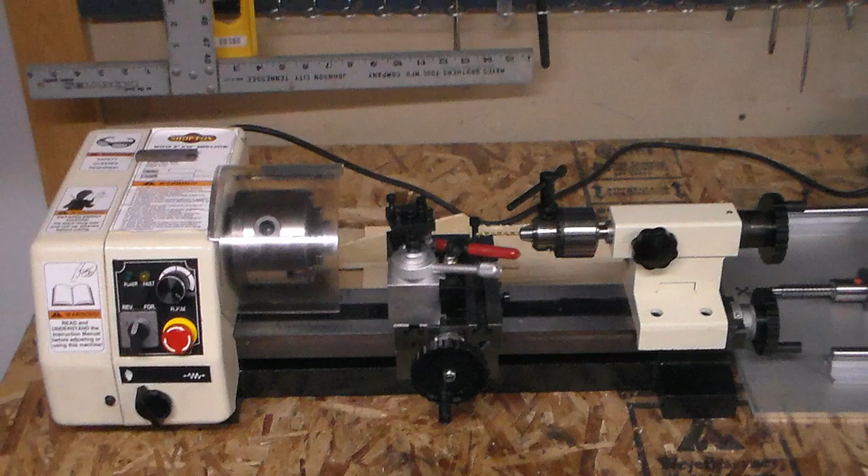I'm going to demonstrate how to take a picture of a house plan and import it into Fusion 360 the easy way. So we're going to go into Google, search for house plans, and go over to images.

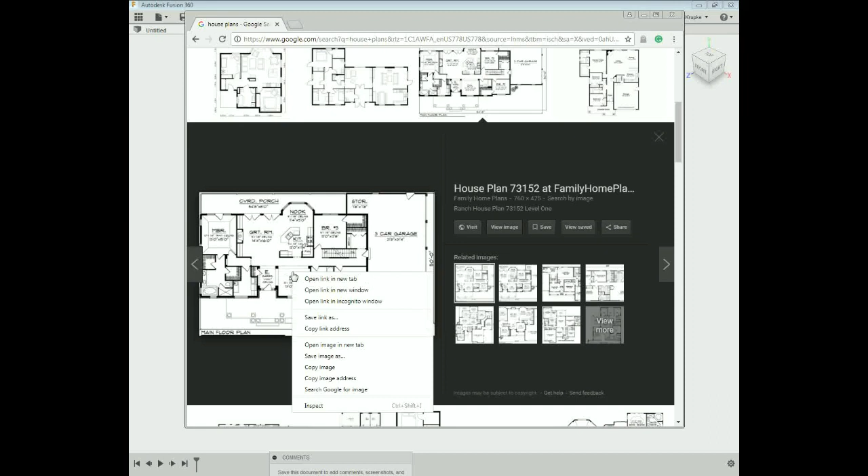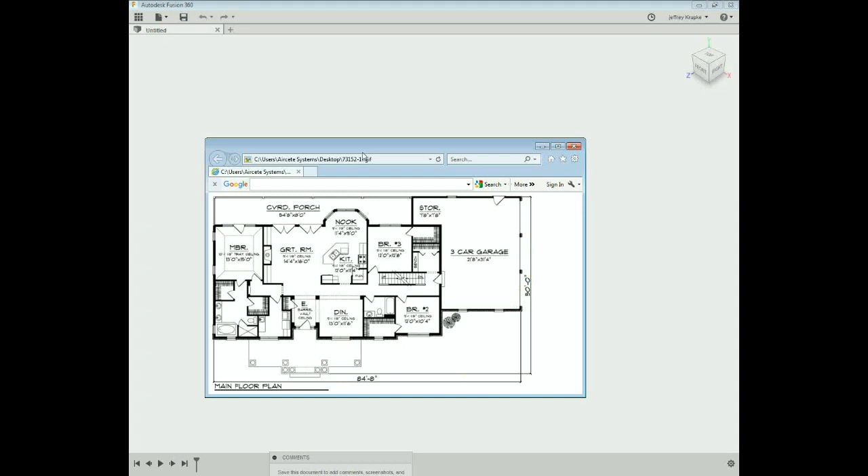Alright guys, I found this design. It's clearly 84 feet 8 inches this way, and 50 feet in this direction. That's perfect, that's what we need. I'm going to put that off screen.

Then I'm going to jump into Fusion here and save the design. I'll call this house plan, and that will start the autosave on Fusion 360. I'm going to put that off screen too, so we don't need to look at it.

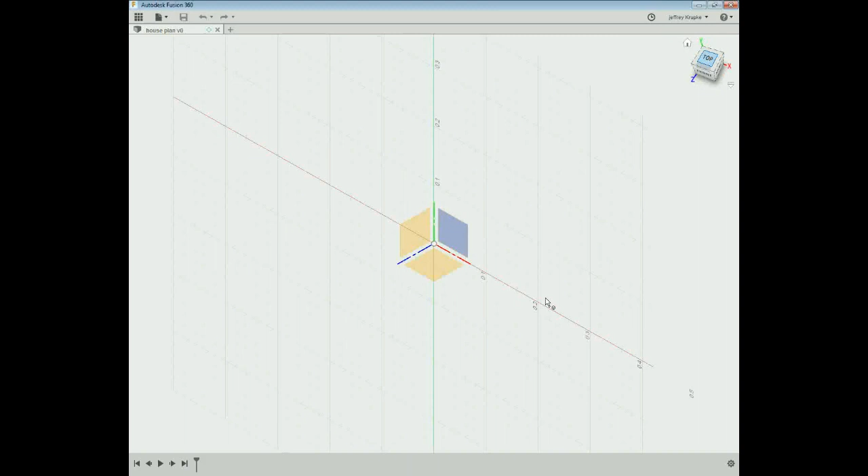Then I'm going to go to a sketch, and choose the top plane to do my sketch on. I'm in feet, so the first measurement is 50 feet, then I hit tab, and do 84 feet and 8 inches.

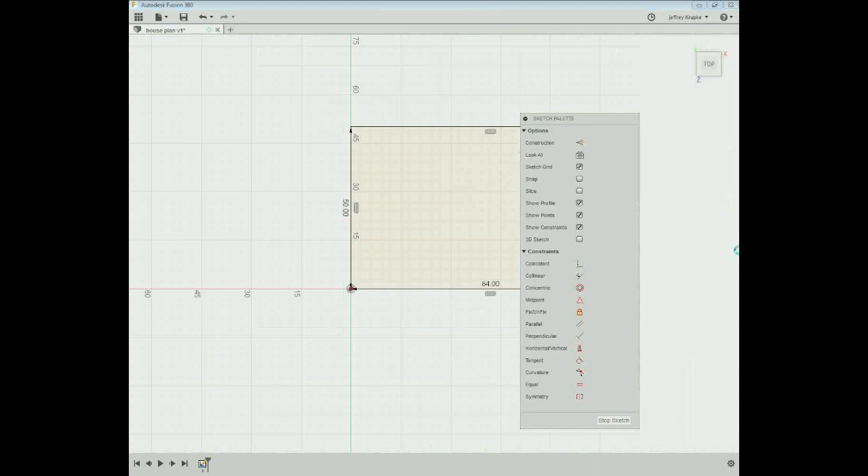Now I'm just going to zoom out and hit fit, close the sketch, and extrude this out to make a face. So hit E for extrude, select that face, and then we can just go out some arbitrary amount.

We'll say 1 foot. Not 3, 1 foot. Actually, I'm just going to do 0.1 feet.

Look at the top, and we have a plane there. We're going to insert the canvas now. Select this face. We're going to select that decal that we downloaded.

Oh, it's going to do that to me. Okay, because it's a GIF, see, it doesn't accept a GIF image, so what we're going to have to do is wash the image through Paint. Paint's an awesome program. So we're going to load that image up, open.

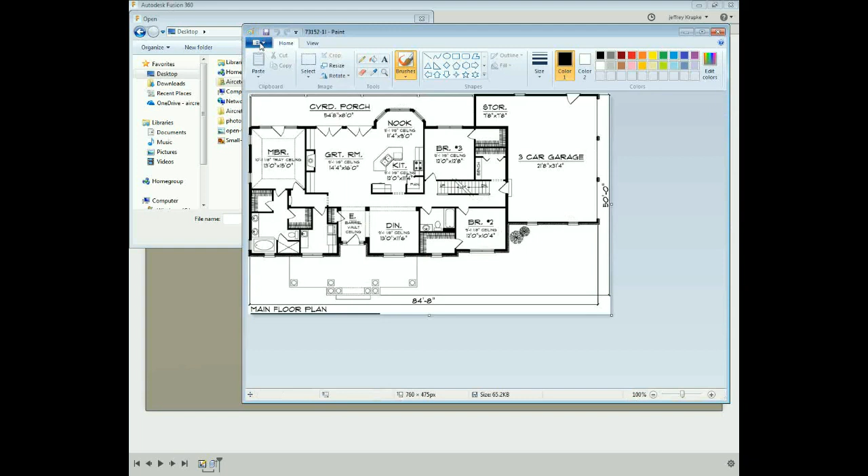Then desktop, and select the picture, and then we're going to save as. We're going to change this type to JPEG, then resave that, and then close Paint. Okay.

So we're going to select this plane, select the image. This is the new JPEG image that we just made. See, oh, that's not the one. Let's try that again. Insert. Select the image, we're going to select this image right here.

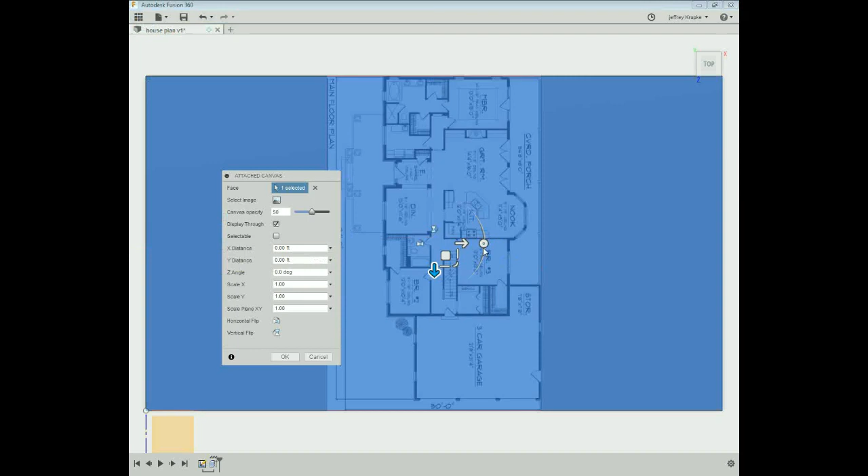Okay, and we are going to turn it, turn it like this so it's the right orientation. I'm going to put this off screen, and then take this, and you're just going to expand this out to match that.

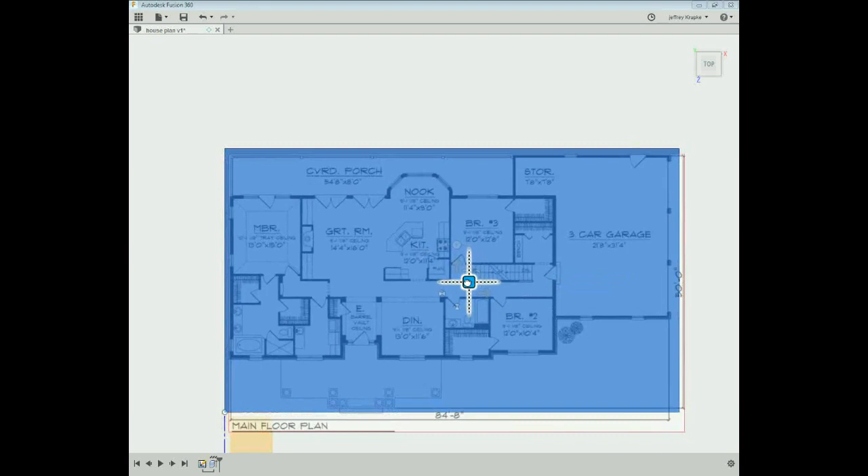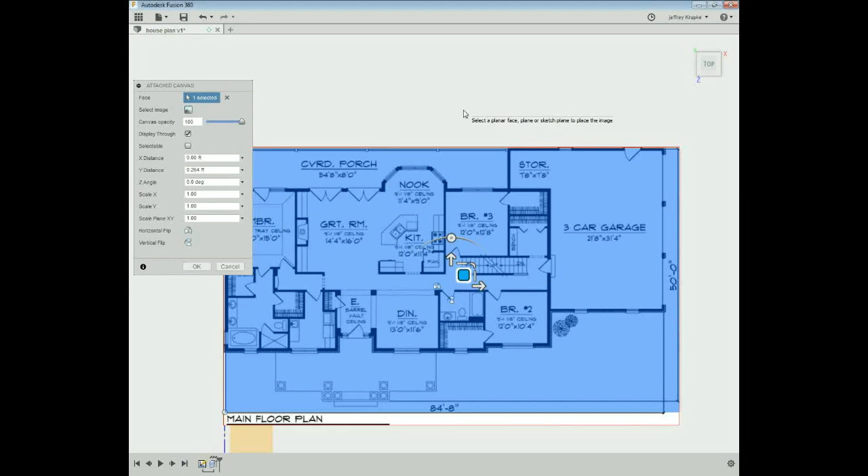Alright, and then I'm going to increase the opaqueness, or decrease the opaqueness, so it's easier to see. And then you have your outline now.

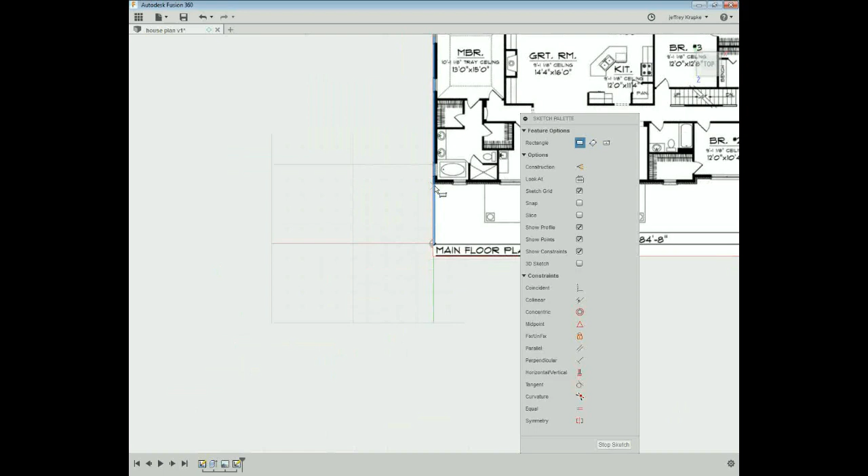So then you can go back into Sketch and zoom in here, and zoom out to get to this other edge. Select that other wall.

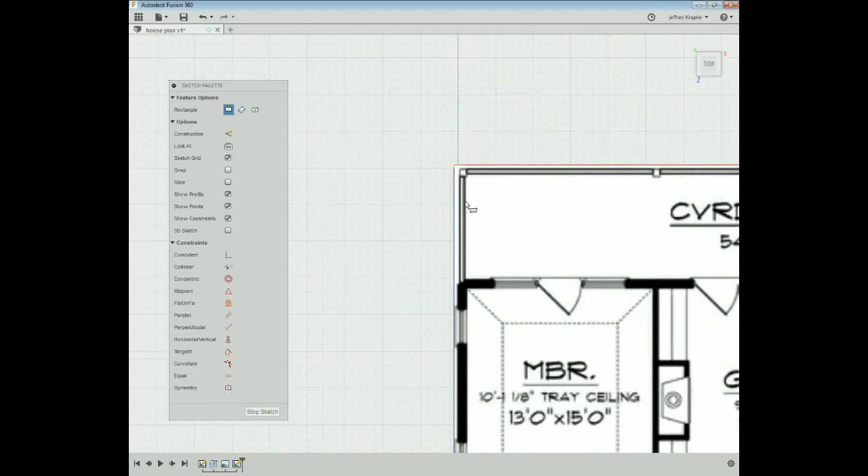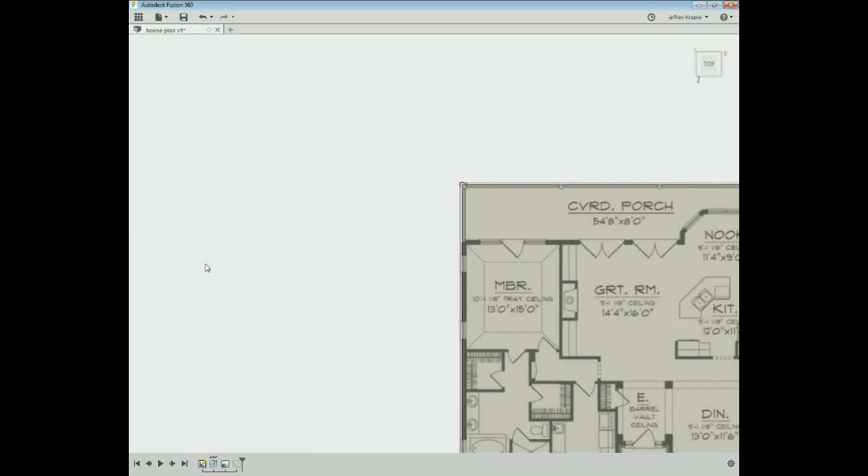I turned the opacity down a little bit, so go back into here, stop the sketch, go back into here, edit the feature, turn the opacity down or up.

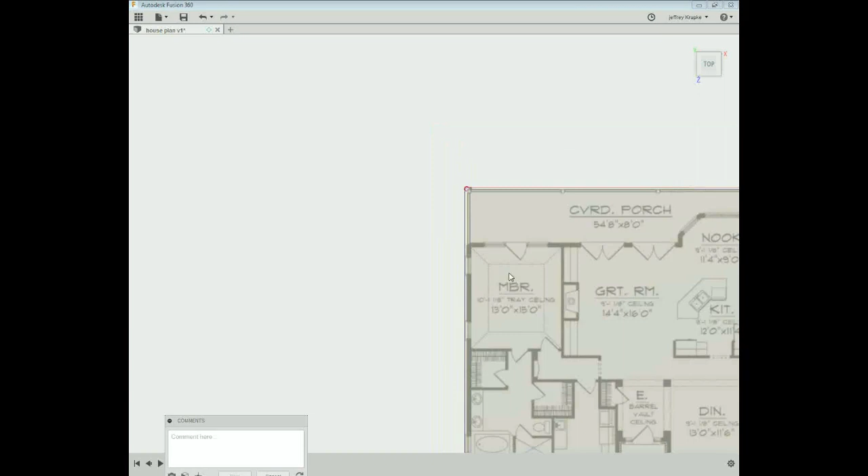You see how you just start tracing the walls out, and this will end up being virtually the same size. It doesn't work out 100% of the time, but you can get this sketched out pretty darn fast and get an idea.

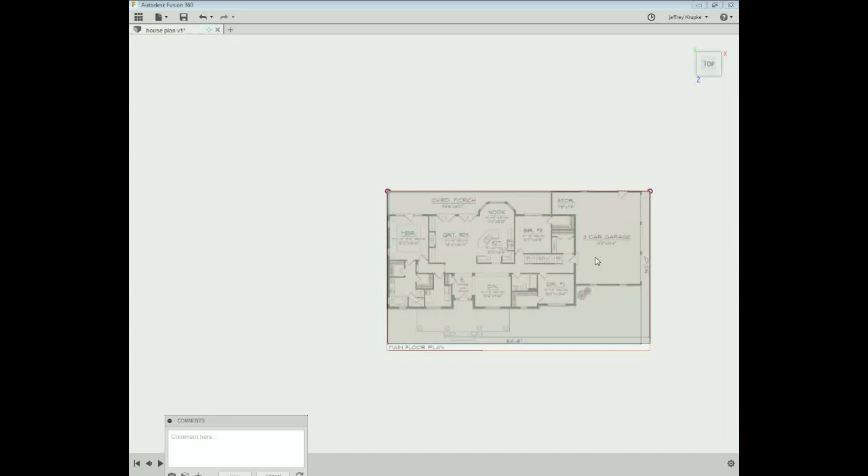And once you have the sketches done, then you extrude the walls out. Let me do some of that for you. The other way you can do it is with the line tool. You just start on the line, clicking at every point.

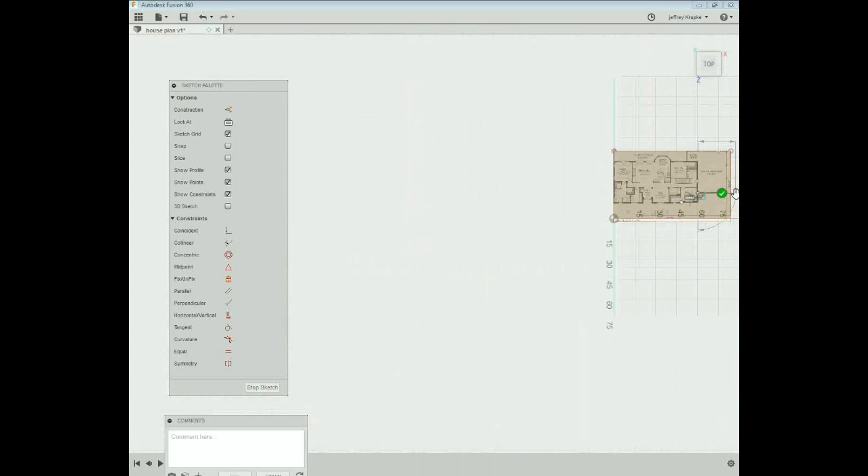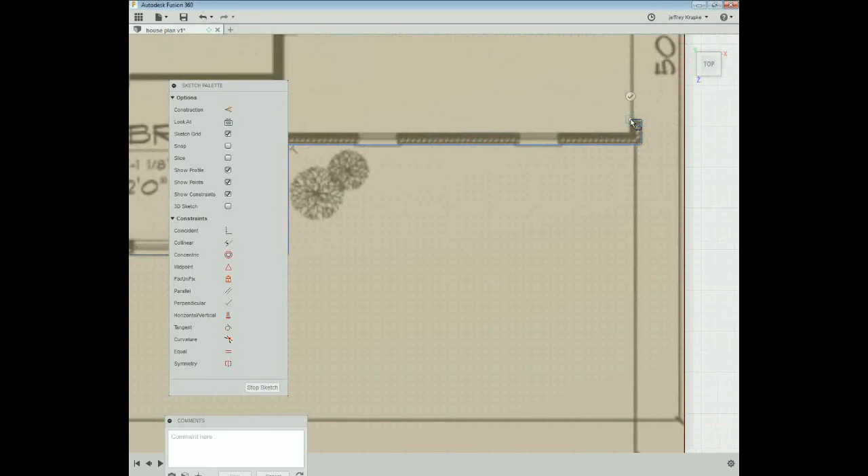If you zoom out and zoom back in way over, a lot of times it'll let you move over. Like I said, this isn't an exact science. Like this one, it looks like the garage, so I'm going to end it there, bring it over, then come down, and I'm back on the wall again.

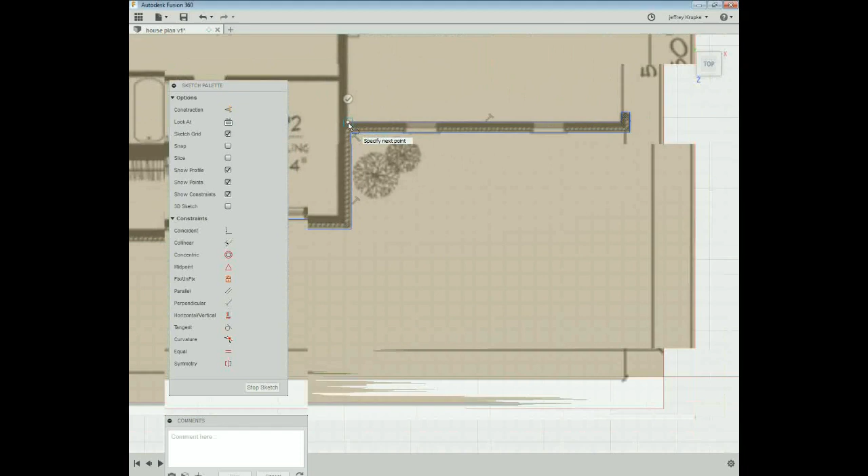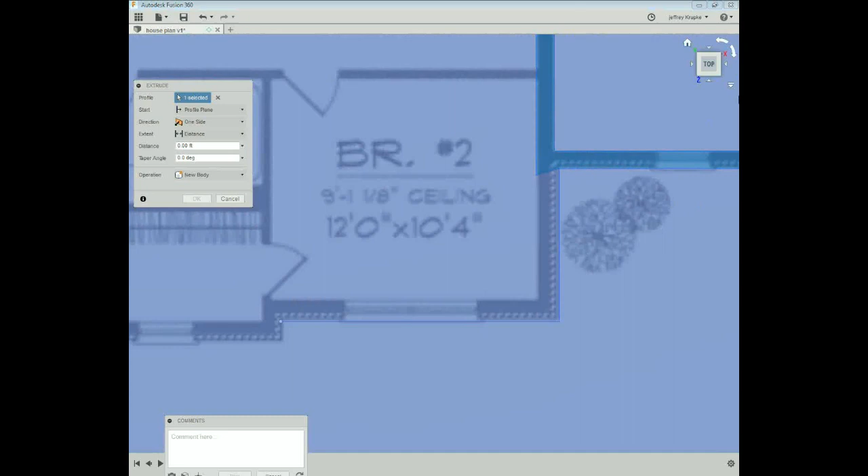The other way to do it would be with the rectangle tool, the two-point rectangle tool. Okay, that's a big long wall, so when you bring it all the way up, okay, so I just did that one wall section for a demonstration. Then I'm going to bring that up 8 feet.

You see how very fast we have the wall. And I don't know about you guys, but that helps out a lot. Then you go through the trouble of cutting in all those windows and stuff to get an idea of what the walls will look like, what the outside elevation will look like. This is an excellent way to take a design off that may or may not look done, or you think, well, this might be the one, it might not be.

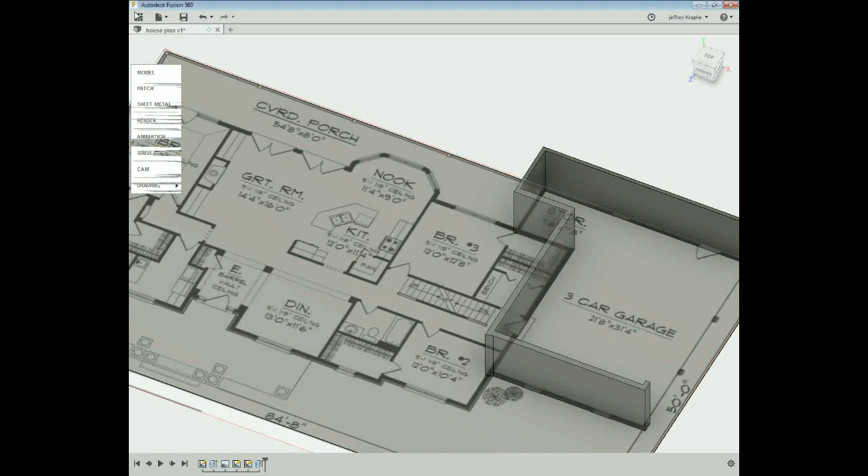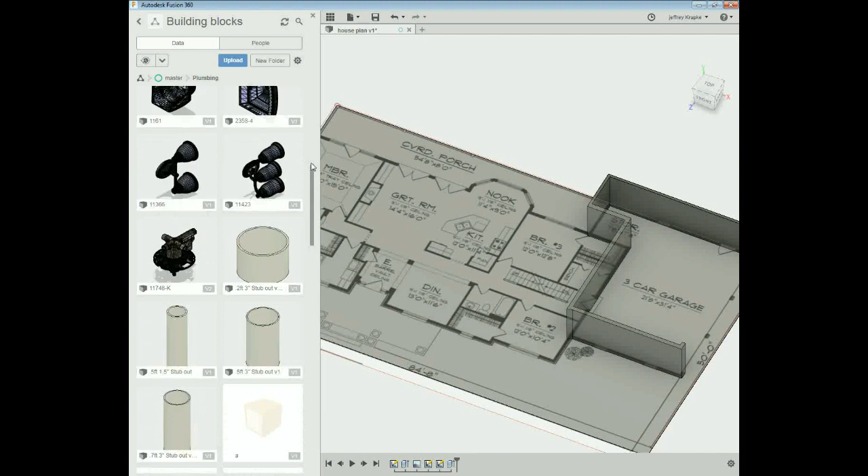Then the other thing I can do is I've created a bunch of, like, plumbing and all sorts of different building materials that I've assembled that I can choose from. So this one is called plumbing. And I'm just going to go ahead and choose the toilet, which is, I believe, right down here somewhere.

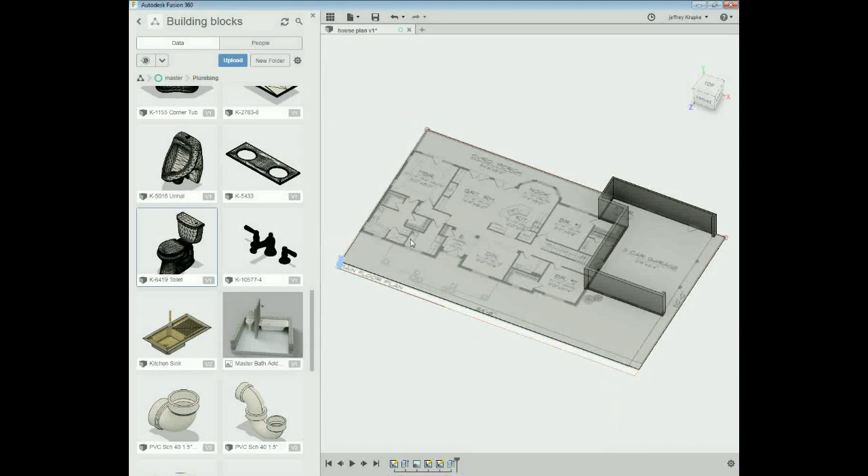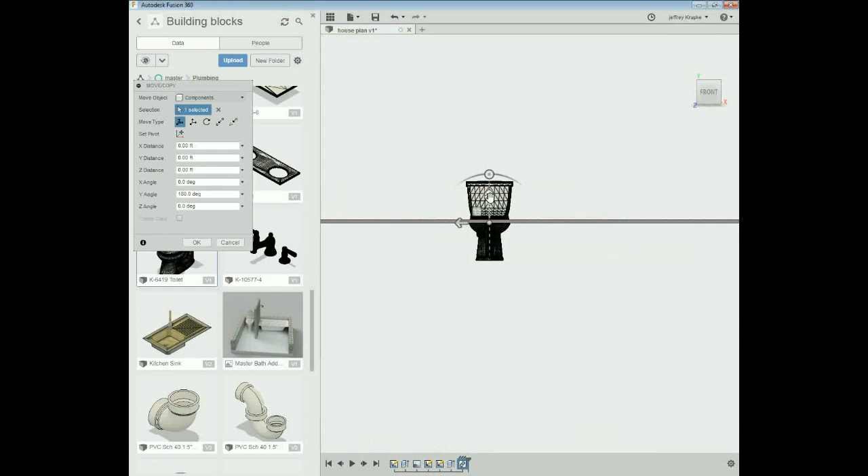In order to add a component in, you just kind of drag it over, and it drops in. And see, this is my toilet right there. So I'm going to go ahead and find the toilet icon, which is right here. I'm going to spin this around. And you can see it's like falling off into the space there. We'll bring it up, basically put it on what's kind of like our floor. And then we're going to stick it right on top of that indicator there.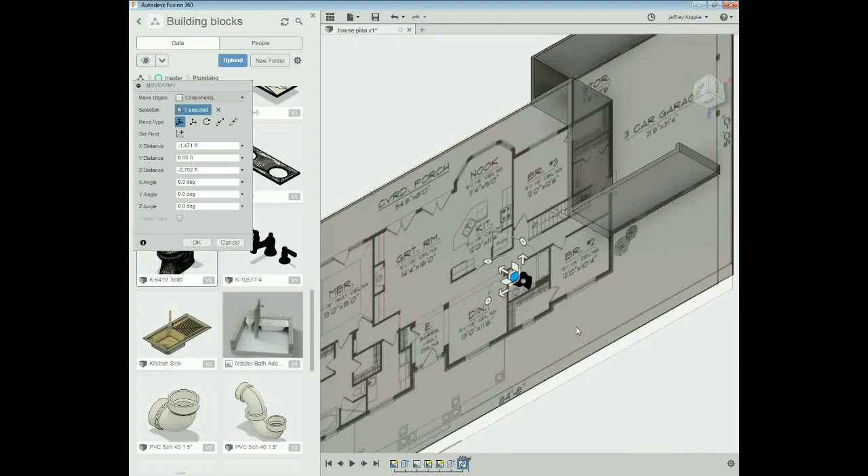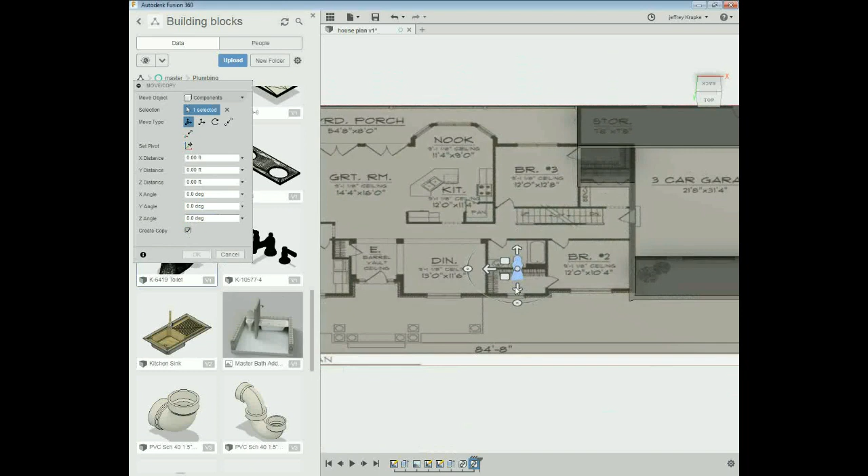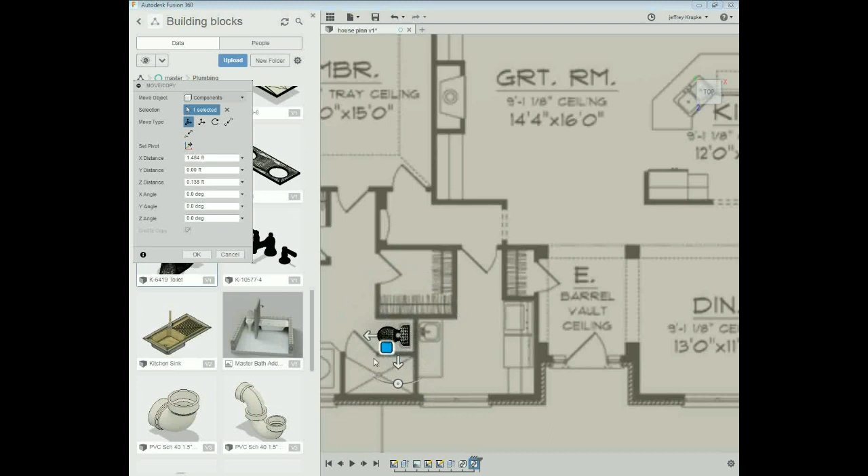So when you go back, you got your toilet there. And then so you have another toilet over here, and that's the best way, is just to take that component, select it in your thing, select copy and move, and then select create a copy, and then go to your top view, and then you're just going to move this new toilet over to the other bathroom. And then you'll want to spin it, stick your toilet right in that space provided, and then click OK, and there's your second toilet in your bathroom.

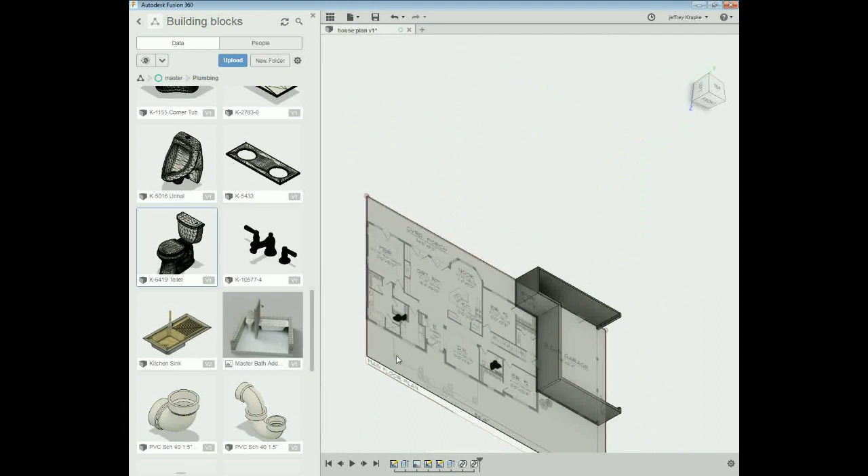So you can really get a feeling for how things are going to look, and you can experiment with different things, put different kinds of cars in, all from a design you just got from Google, off a picture.

If you're going to design this, if you were going farther than the design stage on a project like this, I would probably buy the plans from the company if you really like those designs. But to get a house plan drawn up is another step altogether, you have to have an architect for that. But if you want to get an idea of how a house plan looks in real life, this is the fastest way to go about it.

I could do all these walls probably in about an hour, tracing them all out, and then doing all the cutouts would be probably a couple more hours, and adding the additional windows and stuff, assuming that I have everything in stock.

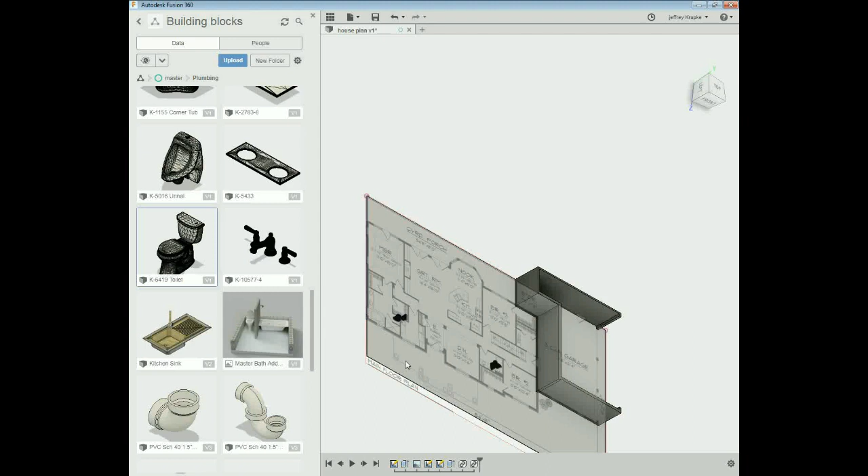The other thing you can do is, now that you know where your toilets and your sinks and stuff are, you can start laying out your plumbing pipes, and start planning out for that.

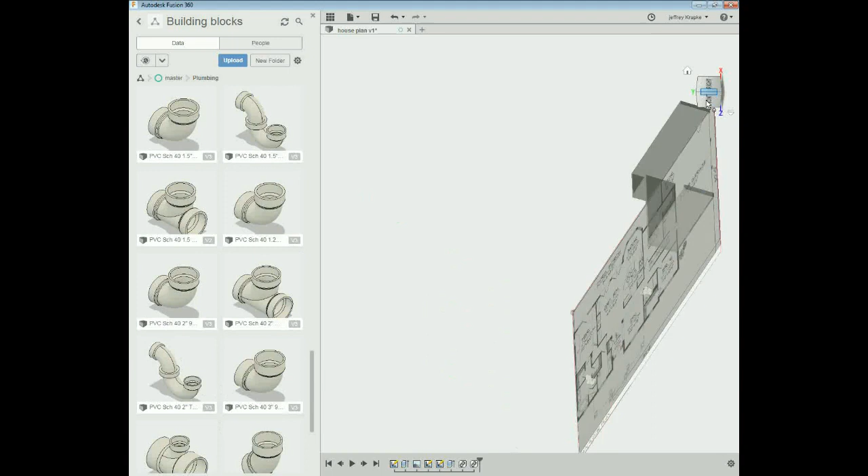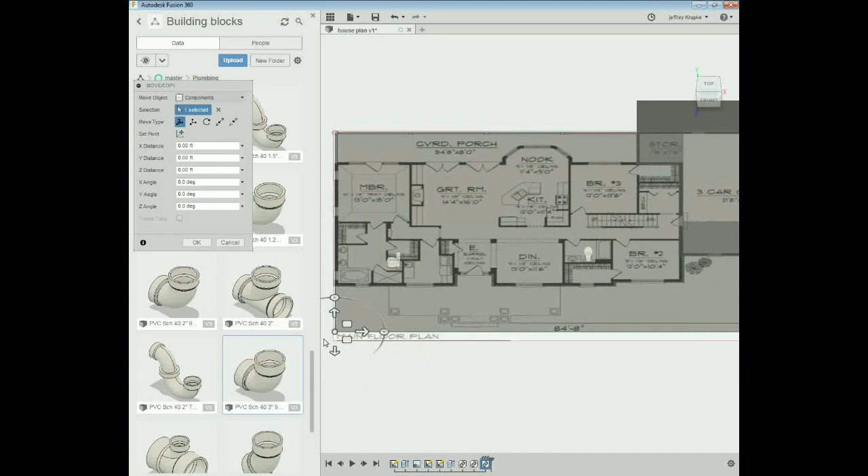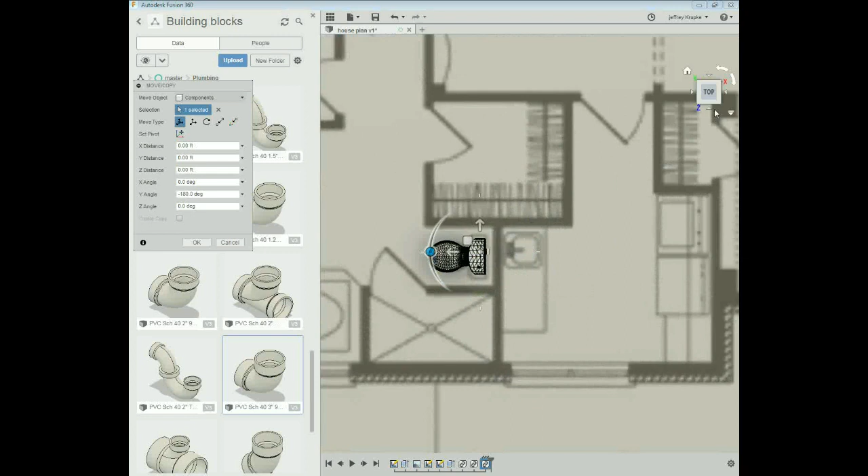So if you're here and you want to put a, let's see, if there's a 3-inch 90, that would go under the toilet. So it's going to bring it in, and then you're going to go to a side view. I'm going to go to a top view on that. I can get the placement down perfect. And you can see it's 90 degrees out, so I'm going to spin it 90 degrees, and then I'm going to look at it with a side view.

I can get in there real close, and then you just place it there. You have to know how deep your floor is going to be and stuff. But then, yeah, you can just plan out your whole plumbing system as well, just like that. I'll probably post another video about how to go about loading in these models and being able to use them.

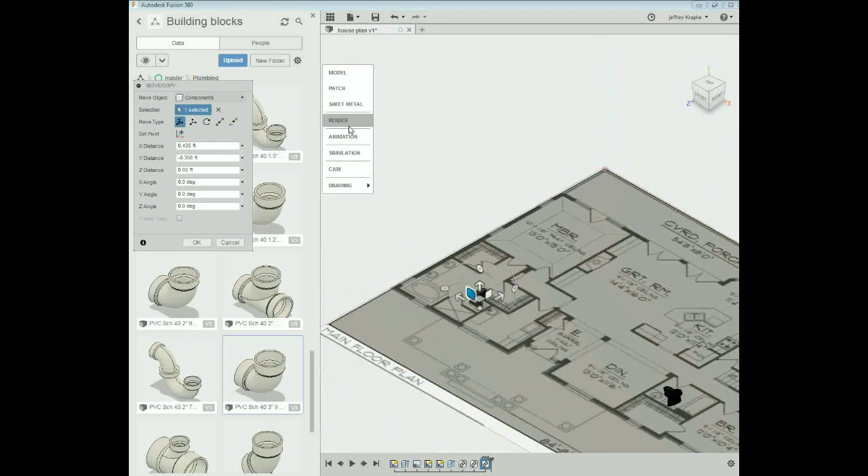Last thing is, when you get done, you can go ahead and render. This is going to come up with a photo detailed drawing. And once you get the walls done and stuff, it looks different. But you can get a photorealistic picture of what the final design is going to look like.

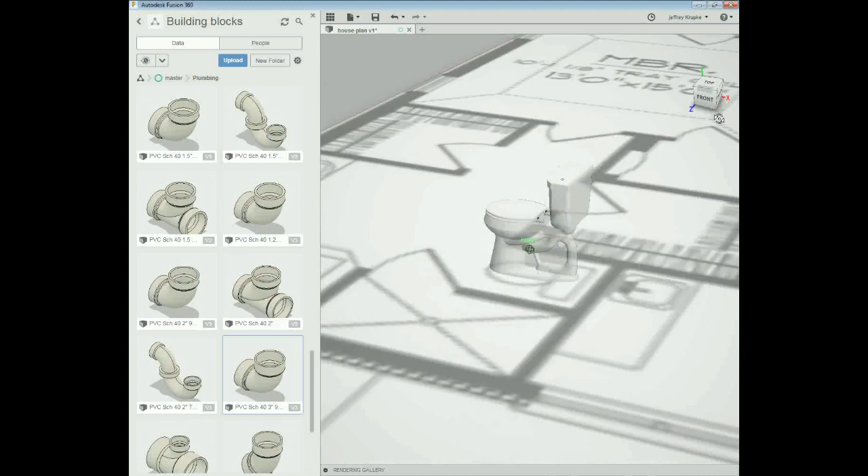Alright, well, I think you get the idea. Basically, you can save those pictures and get an idea of what like a photorealistic picture would look like. Especially helpful with the elevations and stuff. So that's a real quick primer on how to design a house off a plan that you got on Google.